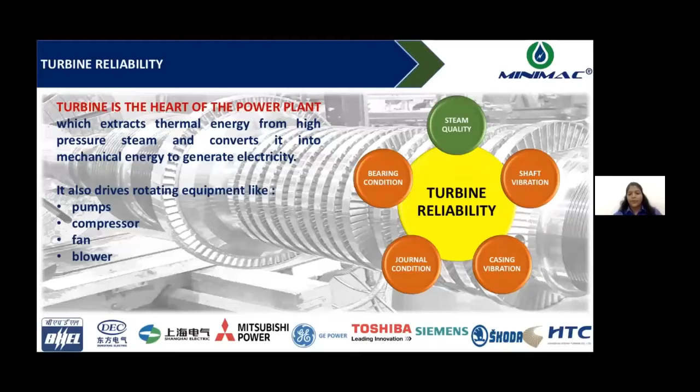So this is the turbine lubrication circuit. Those who are working in power plants, this is a very familiar circuit to them, but please keep it as a recap. And those who are not working, who are from other industries, I'll explain this in a very simple language.

The turbine lubrication starts from the MOT, main oil tank, where the lubricating oil is filled in this reservoir, and with the help of AOP, auxiliary oil pump, it is transferred to the cooler where the heat is dissipated during the operation, and it crosses the bearings of the turbines, that is HP, LP turbines, and when it is returned back through the bucket strainer back to the same reservoir MOT. So this is a simplified closed circuit based on the conventional method.

OVEF is added on the top of the MOT, which is the oil vapor extraction fan, and it is used to expel the fumes generated during the entire process to the atmosphere. Where the power plant is less than 270 megawatt unit KWU design, a part of the turbine oil is also given to the governing system.

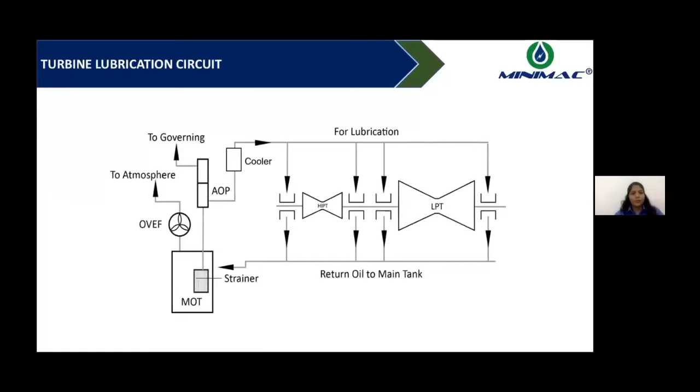Keeping it clean, cool, and dry is a very important part of lubrication management. To sustain this challenging performance, lubricating oil, that is the turbine oil, VG grade of 32 and 46, has to go through many challenges, like high temperature fluctuation. The temperature varies from 42 degrees Celsius to 105 degrees Celsius normally.

And after that, tripping alarm is there. And high speed, the speed varies from 1500 RPM to 6000 RPM, and the turbine has to work restlessly. High moisture, the moisture above 300 ppm is poison to the turbine oil.

Heavy load, a single bearing is loaded with 30 to 40 tons during the operation. Entrained air, the issues of foaming are because of this entrained air. Heat dissipation is the function of circulating oil, and it depends on the thermal conductivity, which further depends on the oil condition. Physical and chemical changes: all above challenges come under the physical, and regarding chemical challenges, it is about the additive depletion.

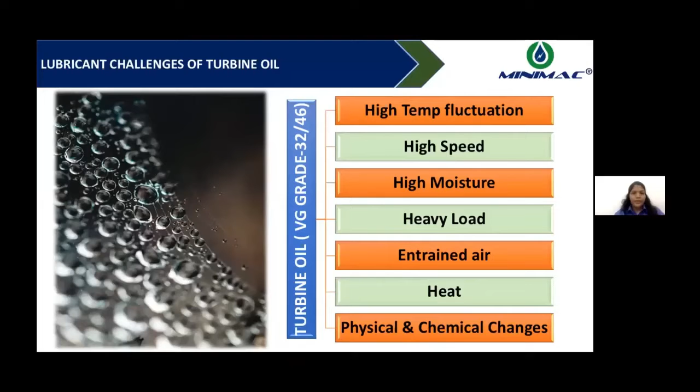So these are the challenges a turbine oil has to go through every day to perform its function. To meet these challenges and to sustain its working environment, turbine oil is designed with these properties as shown in the chart, which should be included in our oil analysis program, like the kinematic viscosity, the TAN values, foaming characteristics.

So I will explain all these five important factors that must be tracked on a regular basis, maybe monthly or quarterly, or as when the equipment is in critical condition. So, foaming characteristics - I will discuss what are the factors that cause them to deviate.

Foaming increases with water and dust contamination and cross contamination of other oils, and because of poor maintenance practices, the foaming increases in the turbine oil. Deaeration is the phenomena of the oil to expel the air content inside it, and its property goes down during the operation because of the contaminant, and it is affected by the seal material or foaming inhibiting additives.

Water content by weight is calculated by weight nowadays because variation in the oil density becomes high due to variation in the base oil and the ambient temperature, and it increases in the form of shaft seal, steam, or leakages.

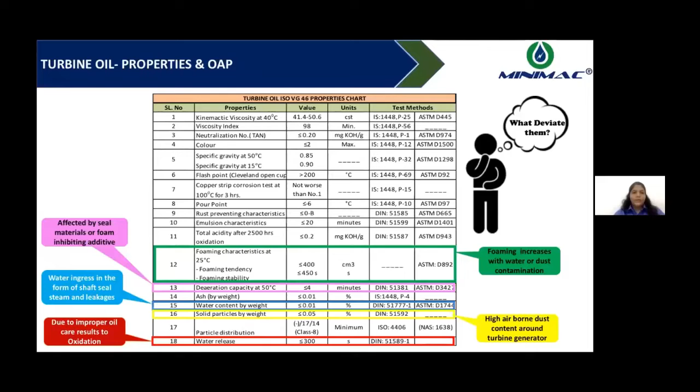So this gets deviated due to the presence of oxidation reaction in the oil, and the oil is abused with a high moisture content due to improper lubrication practices. So you have seen these are the properties of the oil to perform the function.

The function is to reduce the hydrolysis, to improve the lubricity, to prevent the rust, to improve filtration, to reduce the formation of varnish and sludge, to minimize the oxidation. So all this function is performed by the turbine oil to sustain and help achieve reliability of the turbine.

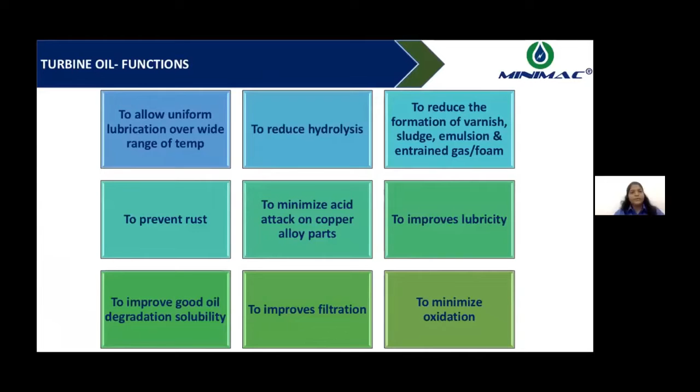This is a list of suggestions we have listed here, which help to control the properties, like the installation of oil purification system. Every point is different, and this is very important. So I will just take one minute to read it out for you all, so that I should not miss any of them.

The first suggestion is to install oil purification system to reduce contamination ingression. Send right oil sample to lab and supplier for inspection and evaluation. Install dynamic or static separator for removing water from turbine oil.

Check the leak tightness of the oil cooler and inspect to prevent entry of water. Regularly inspect gland sealing and oil vapor extraction system for moisture content. Prevent the ingress of silicon-based material into the turbine oil.

Consult oil supplier for turbine oil with foam inhibiting additive. Check oil filter cartridge or element and replace the damaged or clogged one. Check and conceal the source for air

borne contaminant ingress into the oil system. Check micro-negative pressure in the main oil tank and the bearing pedestal and the oil return line, and if necessary, correct using the control valve at the inlet of the oil vapor extraction fan.

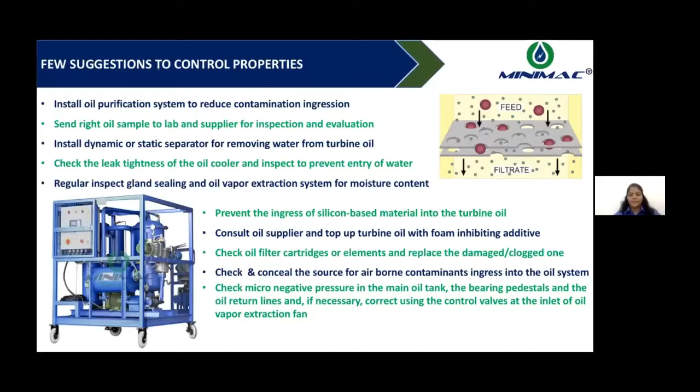Thank you, Shapiti Madam and Bhakti Madam, for the introduction. It was really nice to hear from you regarding turbine oil maintenance and how we can improve the reliability for the turbine. So I will start with some, I can say, bad news for us.

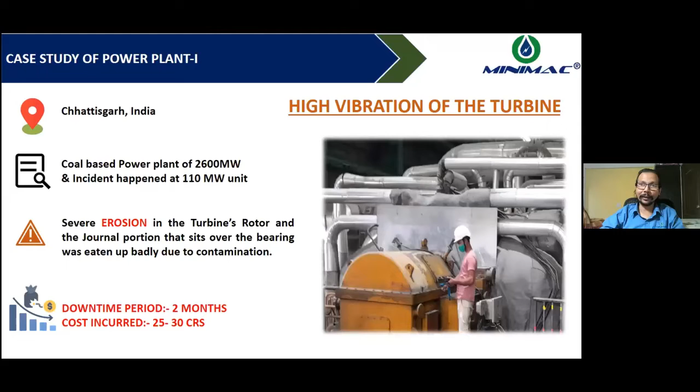This is a loss to the country. Let's see the next case. But loss to the country will be there always. This case we have discussed.

This is a nightmare. No turbine maintenance engineer or power plant engineer will look for this picture. Never, because this is unexpected but well known. Well known how? Yes, there are symptoms.

Turbine vibration was going high continuously, and in the daily data analysis or weekly analysis, whatever is adopted, it was known that turbine vibration is increasing, especially casing vibration was blocked by putting some wood lock or some jacks.

This is ridiculous, not acceptable at all. Because if the turbine is saying something, the turbine is just like a newborn baby, and this newborn baby remains newborn for its lifetime, not for one day. This is very sensitive.

So, negligence on the limits, on the condition monitoring system, or the outcome - we failed miserably. And this was a big unit and the loss was huge.

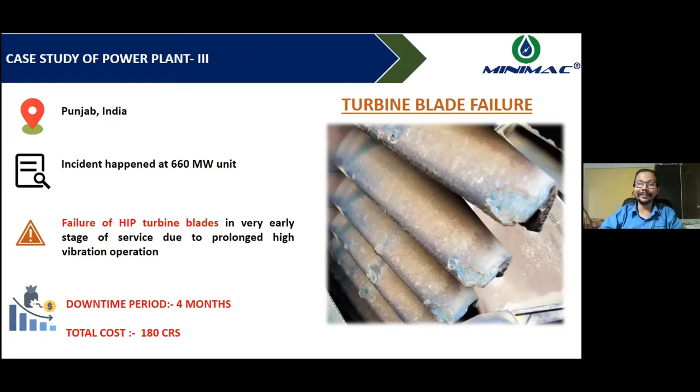The turbine is dancing in front of you and you have to take care where the ornaments have gone, down on the floor. This is the case. And this case was very vital because there was no supplement available to repair it.

Distress calls came to me and even I was not able to answer. Fortunately, across the country, on behalf of Minimac, I am serving the customers or requisitioners direct on phone. So this call came and after that we arranged it from someone else, Japan and so on.

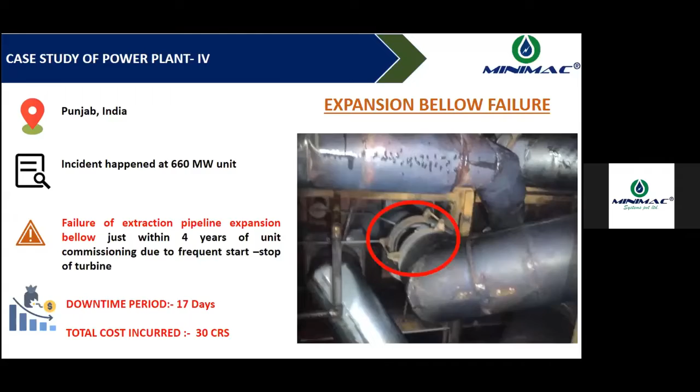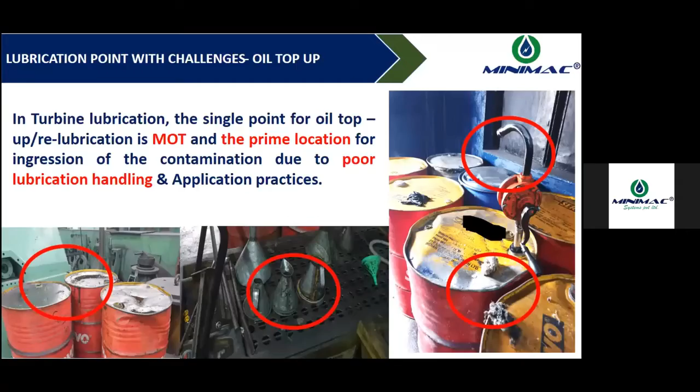Yes, for the turbine, it is not only blood, it is the oxygen, it is everything we are facing nowadays. We can see the picture and no need to explain it much, because the picture itself suggests it. These pictures are giving some glimpse.

Again, I'm saying, if it is going beyond the limit - if limits are there, no need to buy our equipment. Nothing promotional. Yes, but if you require it, please talk to us. And...

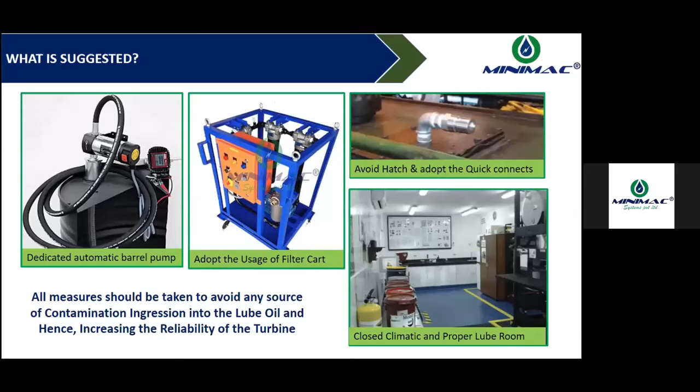If we run the turbine for a long time, yes, we are very happy to run it. We will keep on running it until the time OEM has recommended to overhaul it. Yes, we'll keep running.

Yes, I drained it a number of times. Sometimes 2000 liters, 200 liters, sometimes more than that.

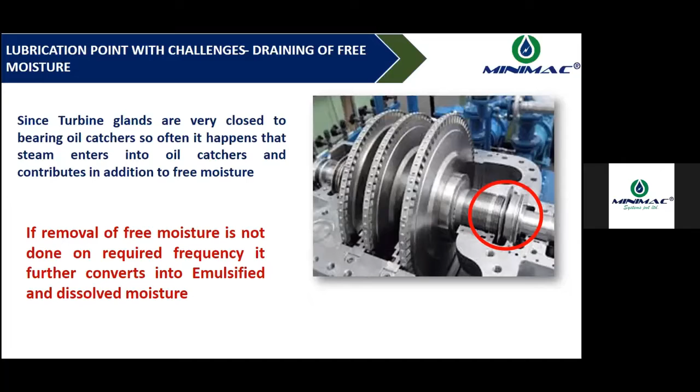So please keep on draining the MOT, and we are here to support you for the guidance. Please contact us, we will support you and guide you with the timelines.

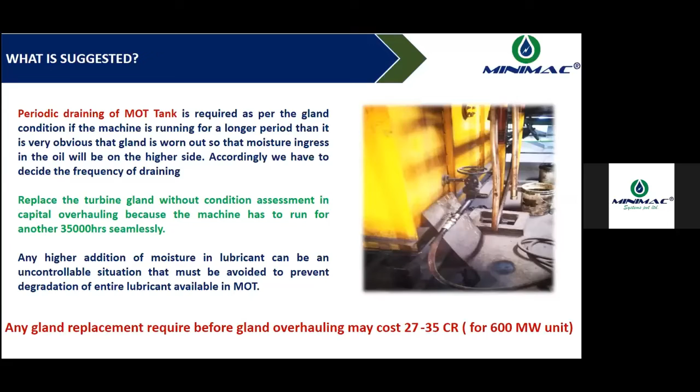Because you can't believe this small cost, which is maximum 2 rupees, 250 or 100 rupees, it costs in billions. Difficult to believe, but you can check online anytime. Whatever we are saying is a fact, and that is available across the globe.

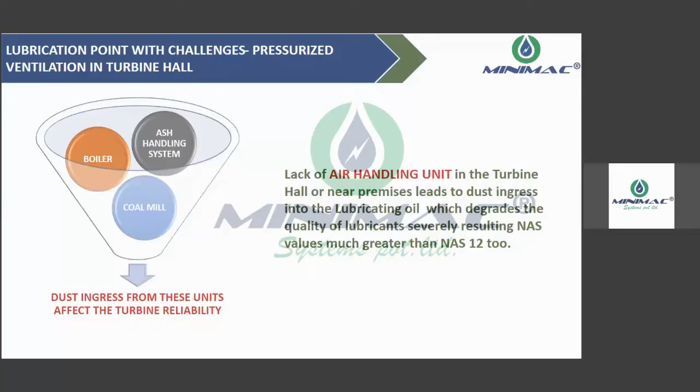Now we will talk about the source of contamination in the turbine hall, apart from the turbine itself. Boiler, ash handling system, coal mill - they are not part of the turbine, but these are the main factors contributing to destroying equipment condition. You can see all three points are contributing to turbine reliability.

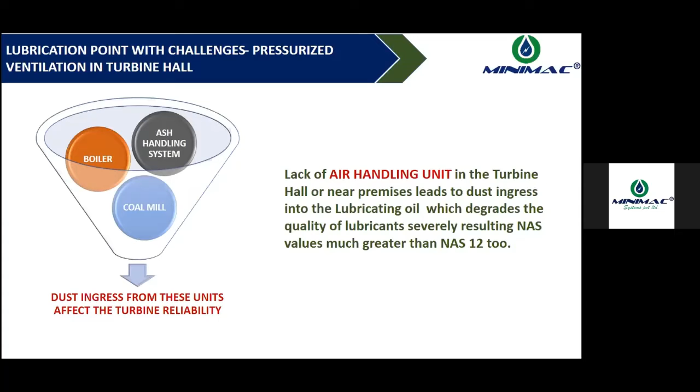Yes, the coal mill is just next to the turbine hall, boiler after that, with ash handling system in between. These all are contributing a lot. This is not their intention, but it's happening.

Yeah, this is the point I wanted to talk about. The polling result is saying that we have this system - that is very great. And those who are not having this system, please implement it.

There should be an air handling unit at the top of the turbine hall or nearby, with a HEPA filter, to take clean air inside and maintain the air condition in the turbine hall. Air condition here is not about temperature, we are talking about contamination. This system is readily available, even we can supply it, nothing new. So please go for the pressurized ventilation system in the turbine hall.

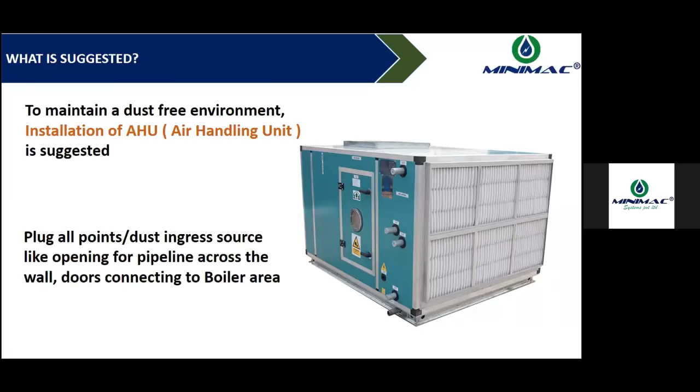It's time to come to the last part of the presentation, especially practices and other things we avoided during our career - our career, I'm saying again, because even if you didn't miss it, I missed it. So every point is important: from lubrication reception, to storage, optimization, lube room management, contamination control, oil analysis program, lube disposal.

Lube disposal is again a different subject. We discussed a bit of this in the last webinar, but right now it's not the time because we are reaching the end of the seminar.

And the second part is about the methods which we are adopting. The methods are good, what you have adopted, but they need to be improved - frankly and openly saying it in this forum, they need to be improved. Let's see what improvement is required.

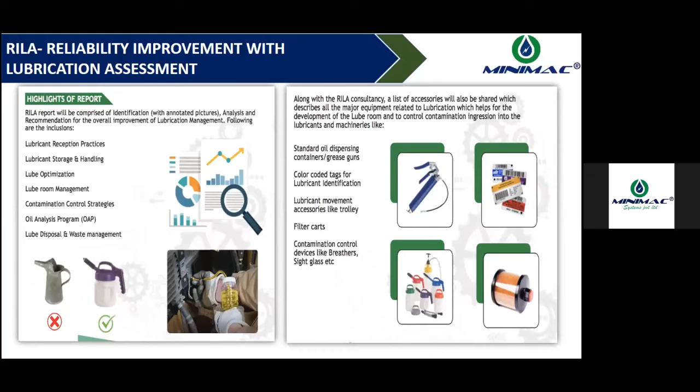I wouldn't like to talk about the remaining two parts because this will look harsh for this seminar, we will talk very comfortably. The next webinar is coming for the question and answer session, where we will explain every point, every question with proof. So the next webinar is coming on the 3rd or 4th of June, and we will explain every point in detail, because that will be a free seminar.